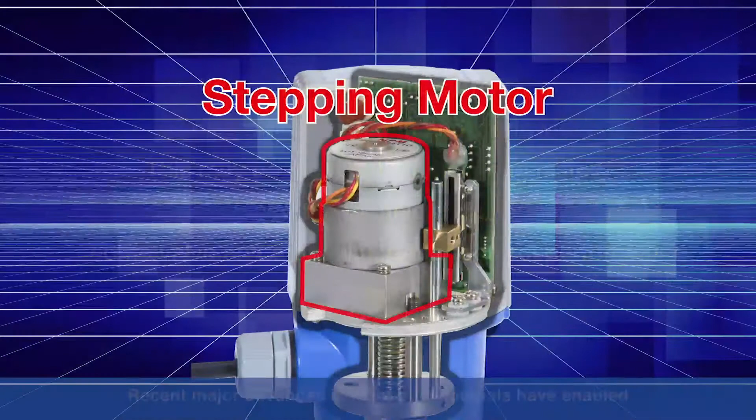Recent major advances in magnetic materials have enabled the development of stepping motors that provide powerful operation just by applying a pulsed current. They have made ideal control performance available. Electric control valves have been created that provide smooth action with a resolution far above 1/1000th and no overshoot.

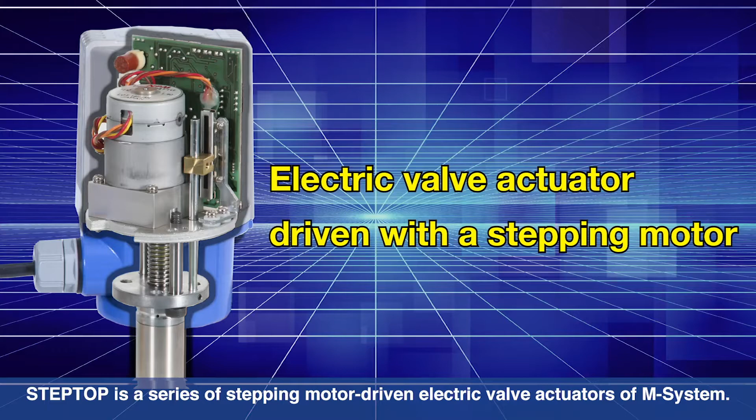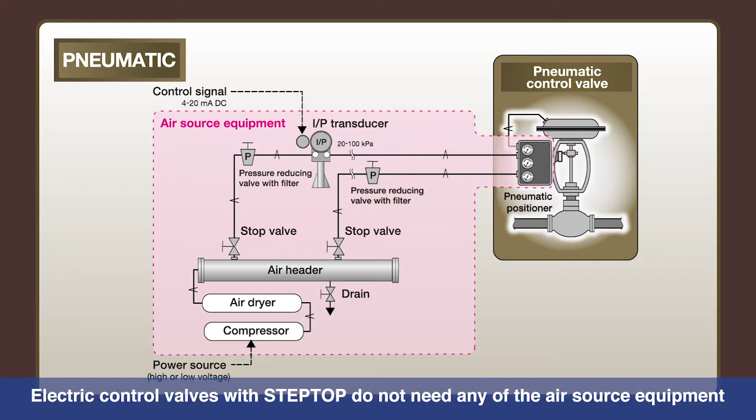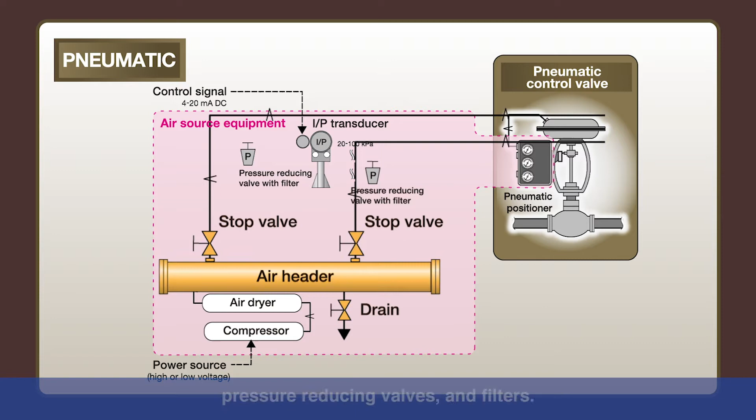STEPTOP is a series of stepping motor-driven electric valve actuators of M-System. Electric control valves with STEPTOP do not need any of the air source equipment that is a mandatory requirement for pneumatic control valves, including compressors, air dryers, air lines, pressure-reducing valves, and filters.

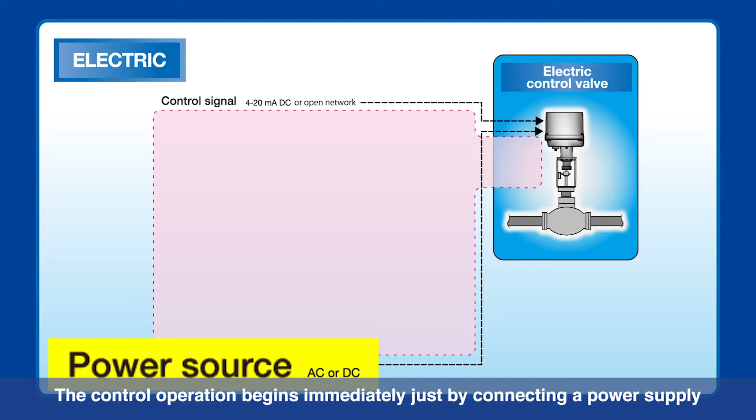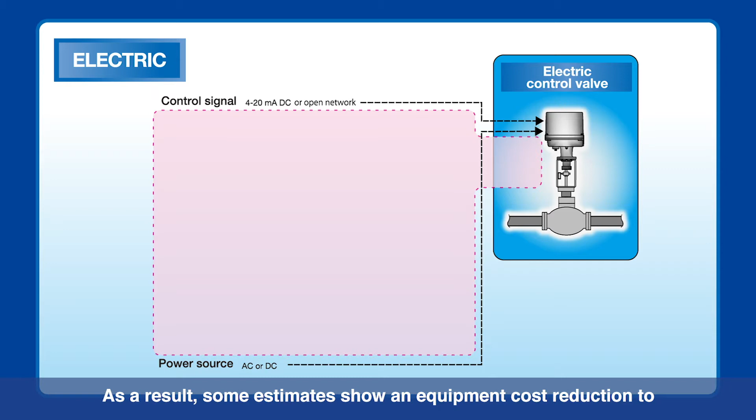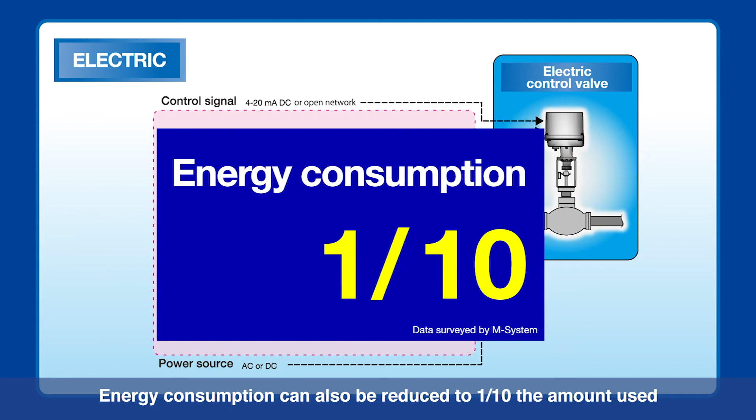The control operation begins immediately just by connecting a power supply and applying a signal of 4 to 20 milliamps. As a result, some estimates show an equipment cost reduction to 1/5 the cost of pneumatic equipment, including the control valve cost. Energy consumption can also be reduced to 1/10 the amount used by pneumatic equipment.

Making electric control valves explosion-proof is not easy, but possible.

M-System has decided to take on an ambitious project for replacing pneumatic control valves with STEPTOP controlled electric control valves in the world.

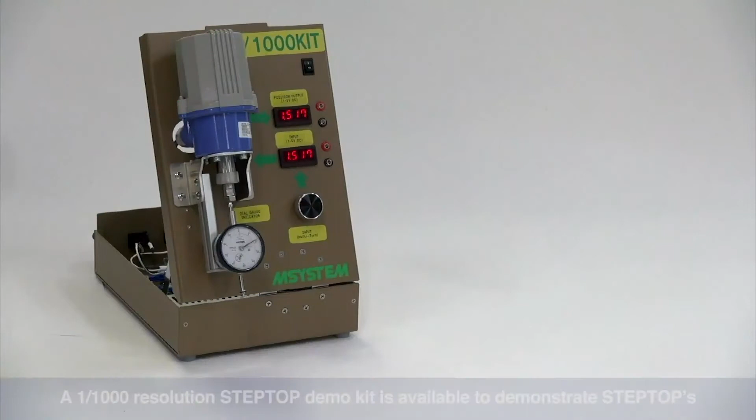A 1/1000th resolution STEPTOP demo kit is available to demonstrate STEPTOP's performance at a glance and show the innovation in electric control valve technology. Be sure to give the demo kit a try.

M-System has two series of STEPTOP electric actuators, the Compact Mini-Top series and the standard Servotop 2 series. Linear motion and rotary motion models are available in each series.

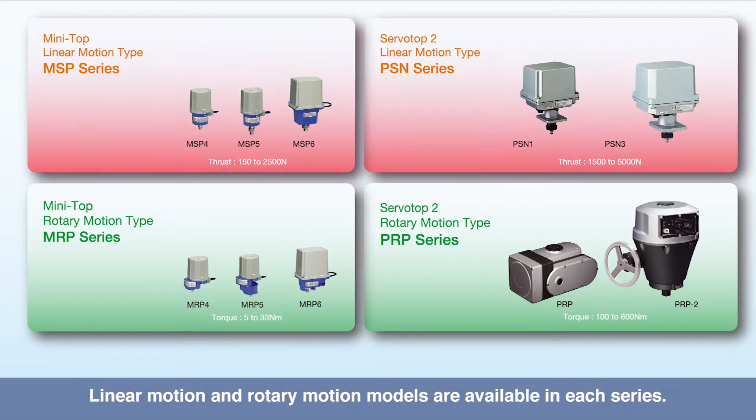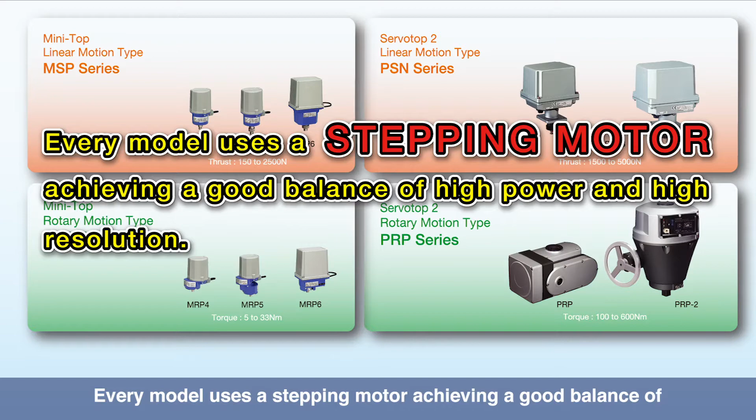Every model uses a stepping motor, achieving a good balance of high power and high resolution. Here is the structural image of the linear motion Mini-Top MSP5 used in the demo kit. The stepping motor is mounted in this area.

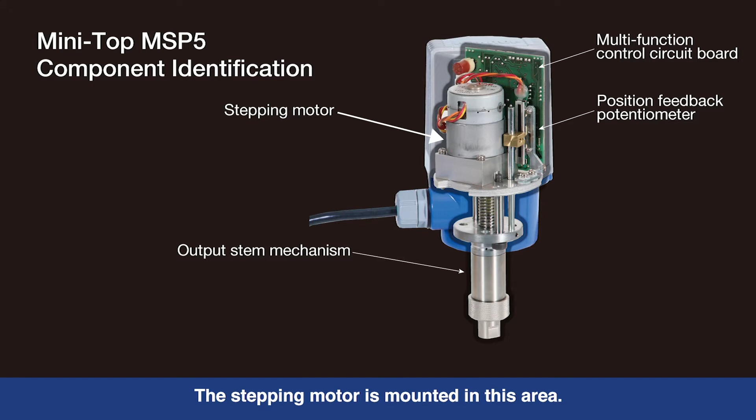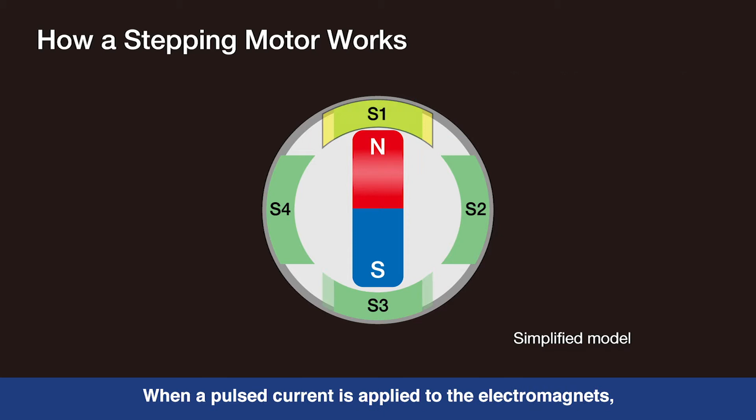A stepping motor has a structure composed of a permanent magnetic rotor surrounded by multiple electromagnets that make a stator. When a pulsed current is applied to the electromagnets, the rotor shaft rotates precisely at a fixed angle.

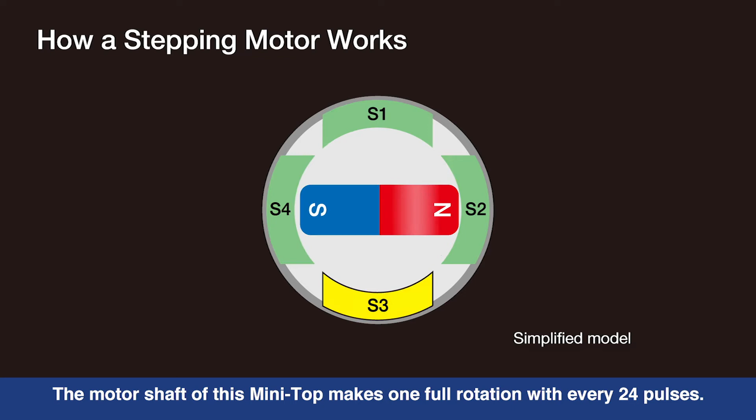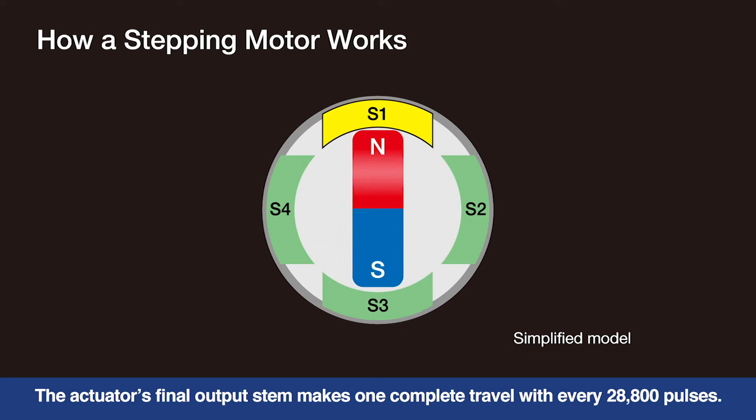The motor shaft of this Mini-Top makes one full rotation with every 24 pulses. The actuator's final output stem makes one complete travel with every 28,800 pulses. So these numbers correspond to a theoretical resolution of 1/28,800th per pulse.

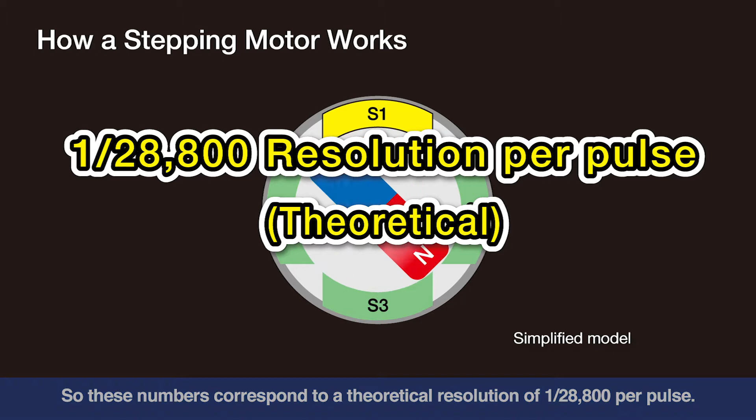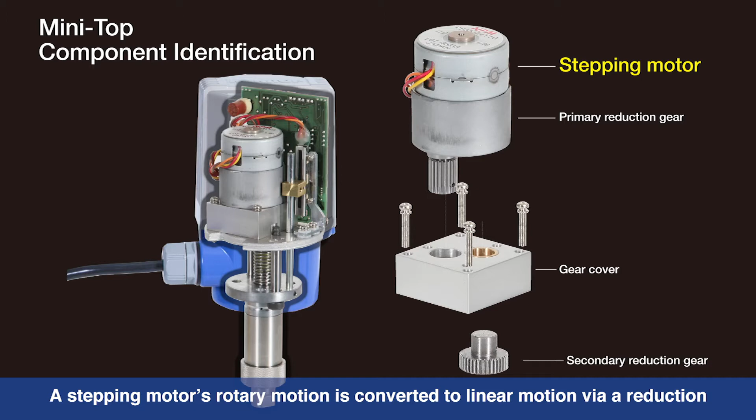A stepping motor's rotary motion is converted to linear motion via a reduction gear mechanism by means of a screw nut composed of a screw shaft and a nut. A linear potentiometer is connected directly to the output stem, and the stem's position is fed back to the control circuit.

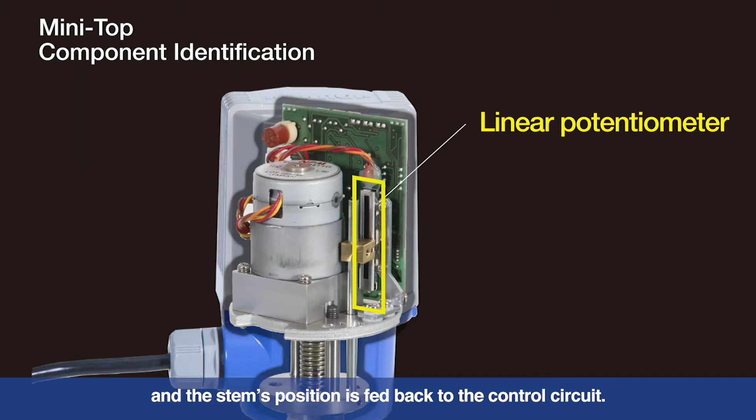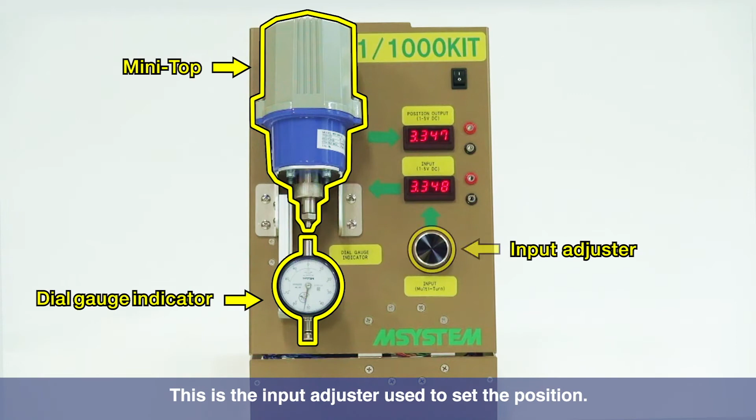Now let's use the demo kit to see the actual operation. This area is the Mini-Top. The output stem's operation is shown on the dial gauge indicator. This is the input adjuster used to set the position. The 4-digit digital panel meters display the position control input and the position output.

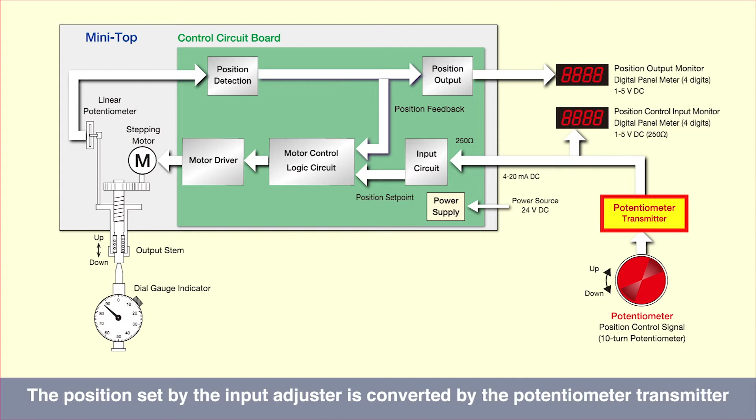This is a function block diagram of the demo kit. The position set by the input adjuster is converted by the potentiometer transmitter and provided to the motor control logic circuit. At the same time, it is displayed in the digital panel meter.

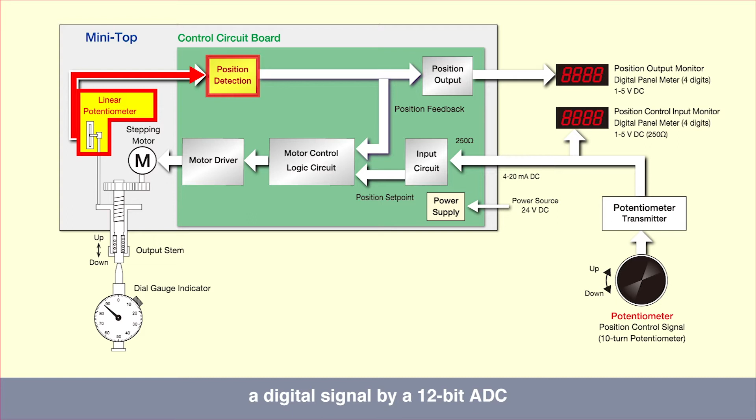The position detected by the linear potentiometer is converted to a digital signal by a 12-bit ADC and input as a feedback value to the motor control logic circuit. At the same time, it is displayed in the digital panel meter.

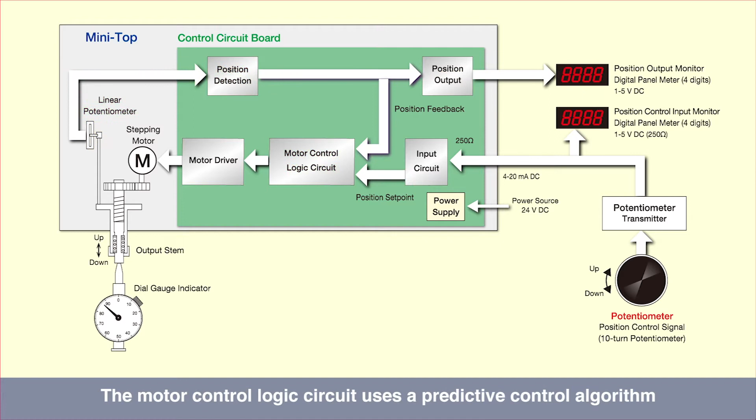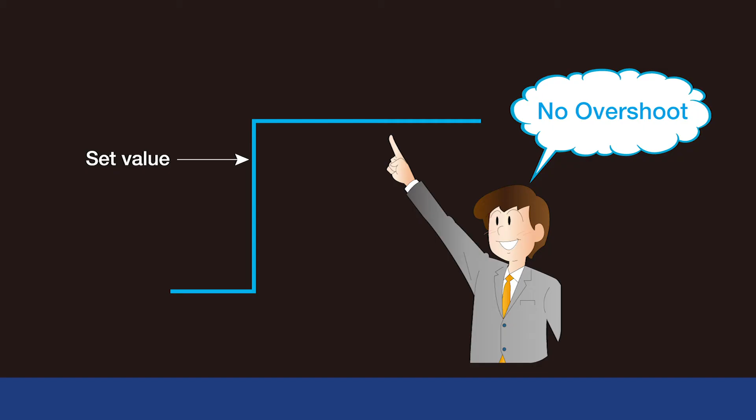The motor control logic circuit uses a predictive control algorithm to digitally control the stepping motor so that the set value matches the feedback value. As a result, it can attain a position resolution of over 1/1000th.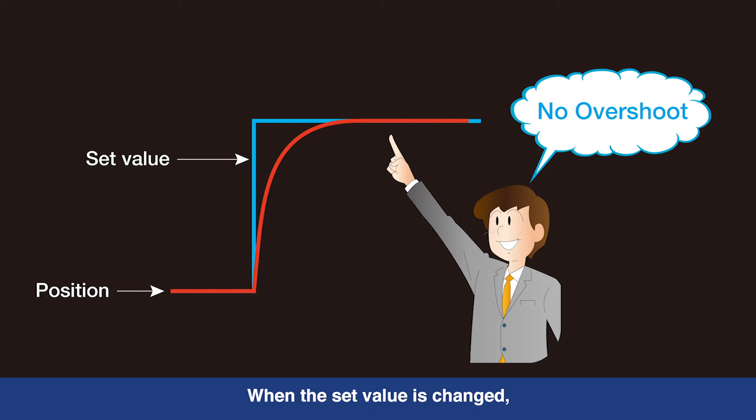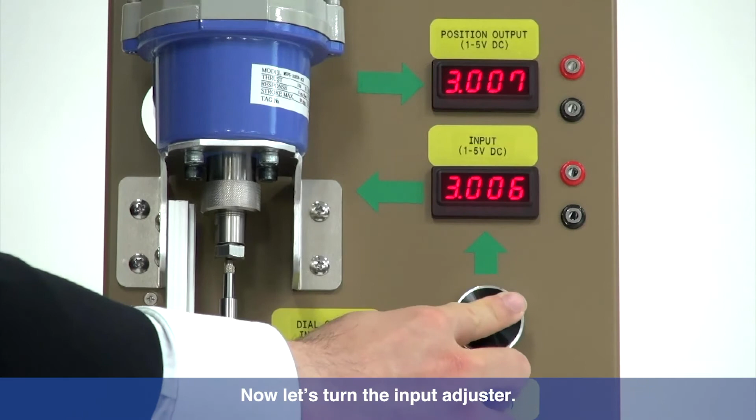When the set value is changed, the position follows immediately to match it with no overshoot. Now let's turn the input adjuster. Notice the values in the position control input meter and position output meter.

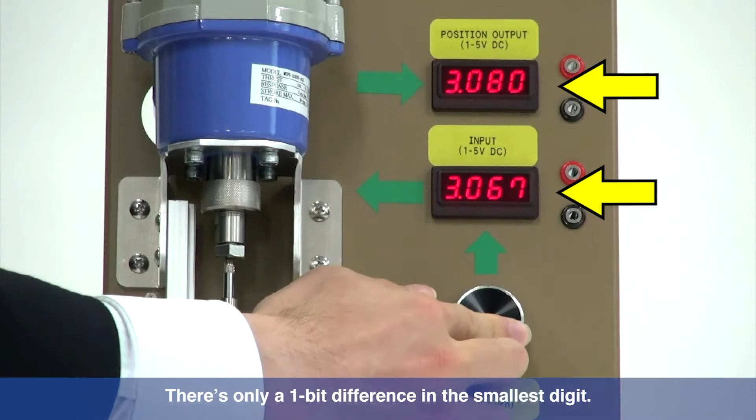There's only a 1-bit difference in the smallest digit. The digital panel meters have a span of 1 to 5 volts, which means this difference is only 1/4000th.

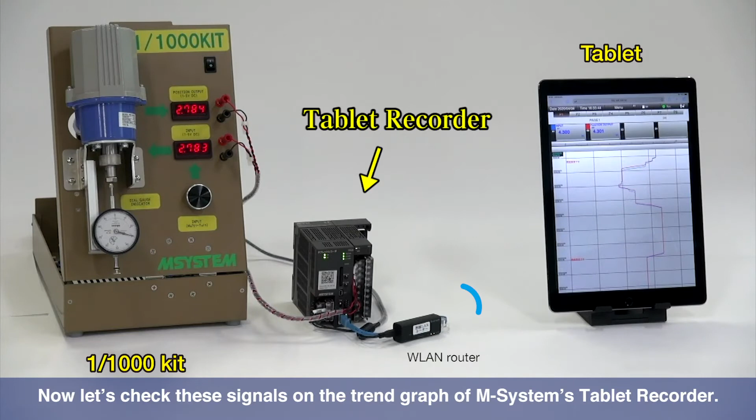Now let's check these signals on the trend graph of M-System's tablet recorder. This is a next-generation type recorder that can display a trend chart on a tablet device.

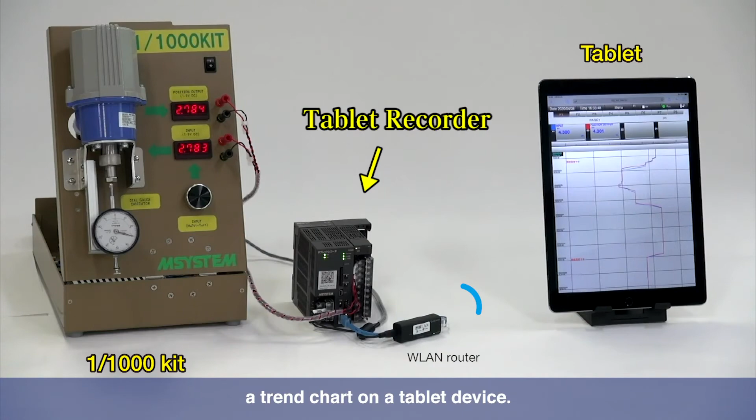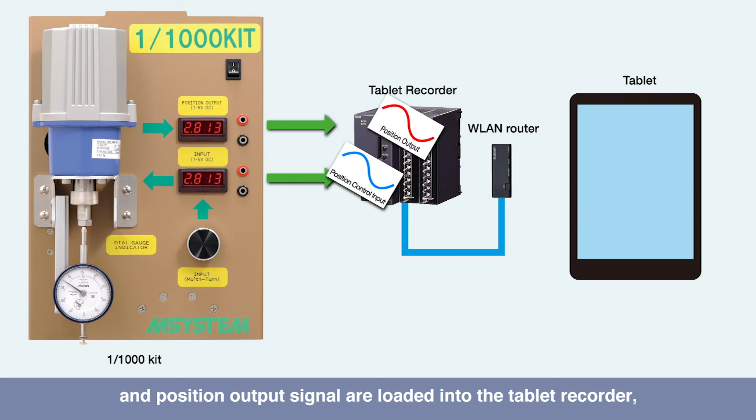When the 1 to 5 volt position control input signal and position output signal are loaded into the tablet recorder, pen traces appear in the trend graph.

Now let's turn the input adjuster slowly. The change in the position control input signal is shown by the blue pen and the position output signal by the red pen.

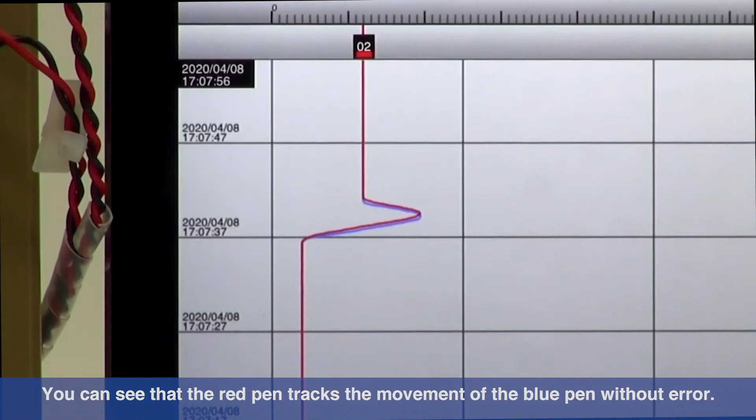You can see that the red pen tracks the movement of the blue pen without error. That means the actuator moves smoothly with no overshoot. You can see that even if the input signal is changed quickly, the position output signal still follows with no overshoot.

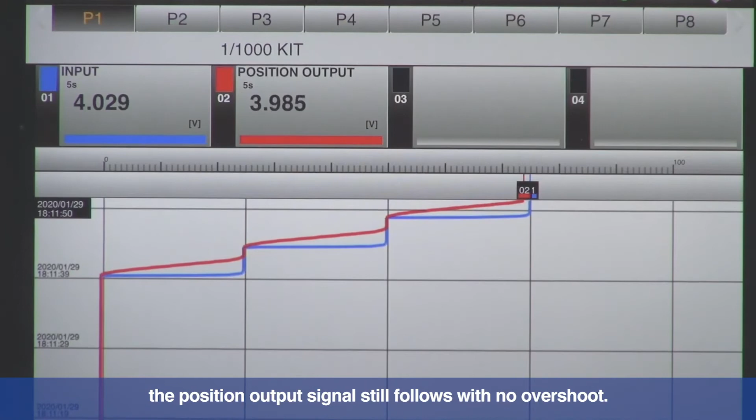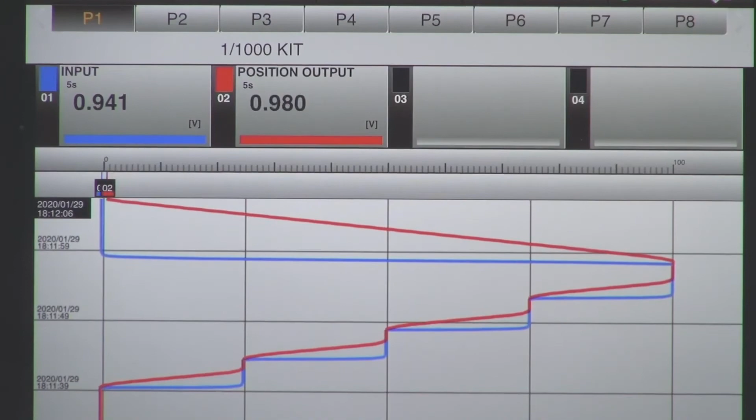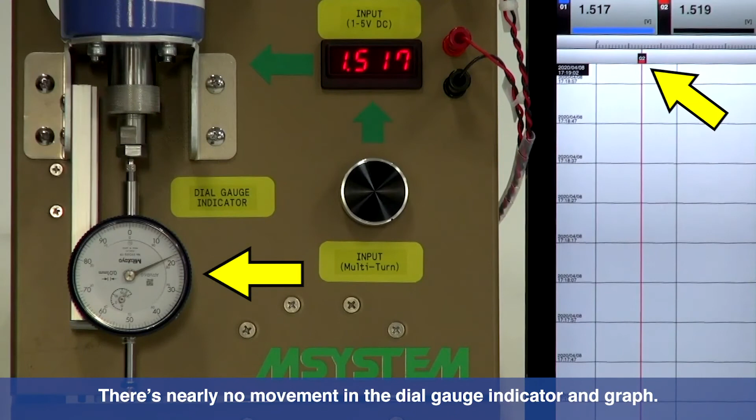Now let's apply force to the output stem. There's nearly no movement in the dial gauge indicator and graph. So you can see that even when using as a control valve, there is no effect of the reaction force of fluid.

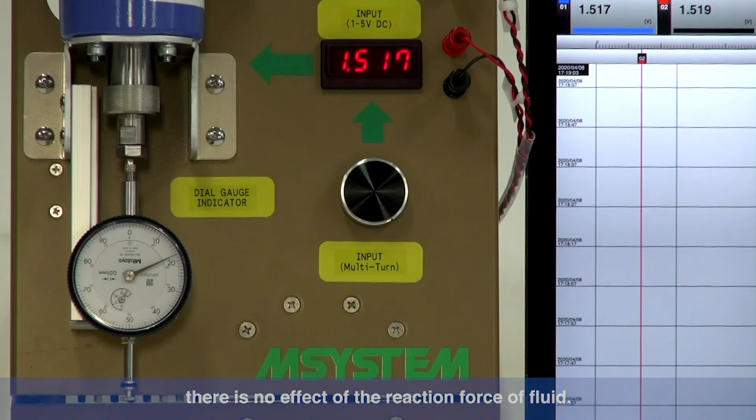So we've seen that STEPTOP electric actuators have the following features: resolution far above 1/1000th, control performance with no overshoot, and nearly no effect of the reaction force of fluid. These outstanding benefits are what makes STEPTOP electric actuators superior to pneumatic types.

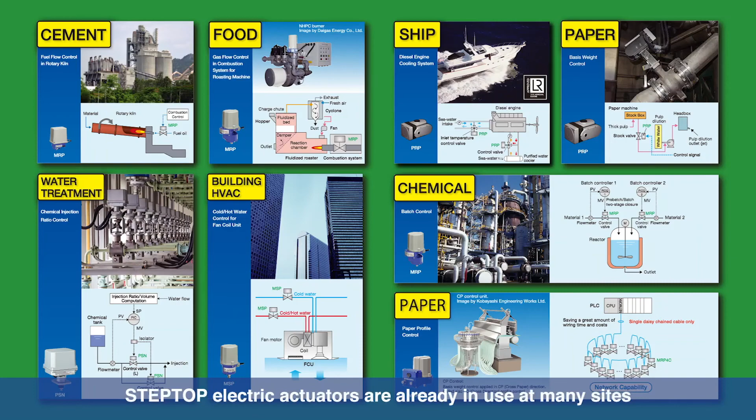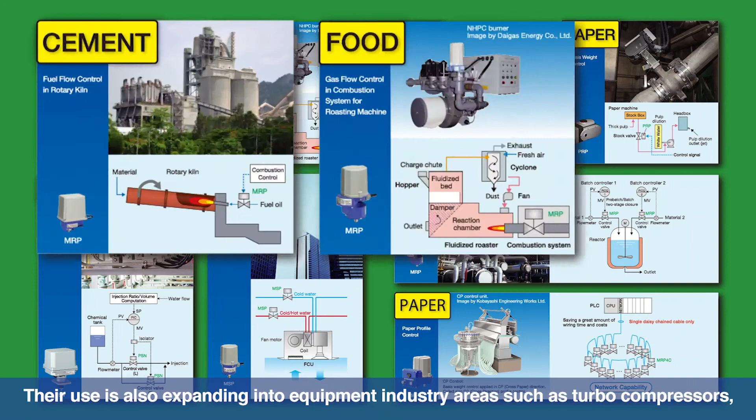STEPTOP electric actuators are already in use at many sites for process automation, factory automation, and building automation. Their use is also expanding into equipment industry areas such as turbo compressors, chillers, and food processing machinery.

The era of electric control valves is here. STEPTOP should be useful for a wide range of applications requiring precision settings for user plants and equipment.